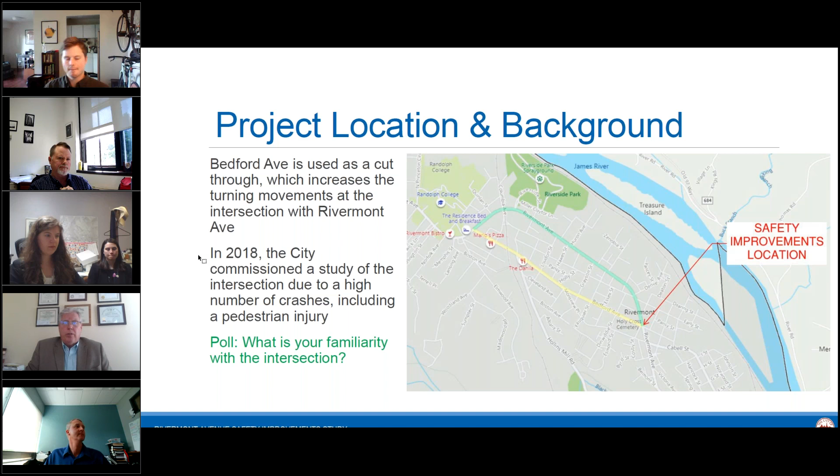Now for the next slide, Mike Johnson with Hurt and Proffitt will describe the rest of the presentation to you. Thank you, Bill. As Bill said, my name is Mike Johnson. I'm going to be the design engineer for the improvements. We'll also oversee the actual construction, which is going to be a big part of this project.

Wanted to go through the background of the project to where we are today, and then where we're going moving forward from here.

As Bill said, in 2018 we had a traffic study done of the intersection. What you see on the screen to the right is the recommendations of that study. Based on the fact that 25% of those northbound turns go left onto Bedford Avenue, and almost all of the traffic coming off of Bedford Avenue is turning right or southbound onto Rivermont, the recommendations for safety improvements at the intersection included this median that cuts off the left-hand turns off of Rivermont and off of the two approaches of Bedford Avenue. This recommendation was used for the federal funding grant.

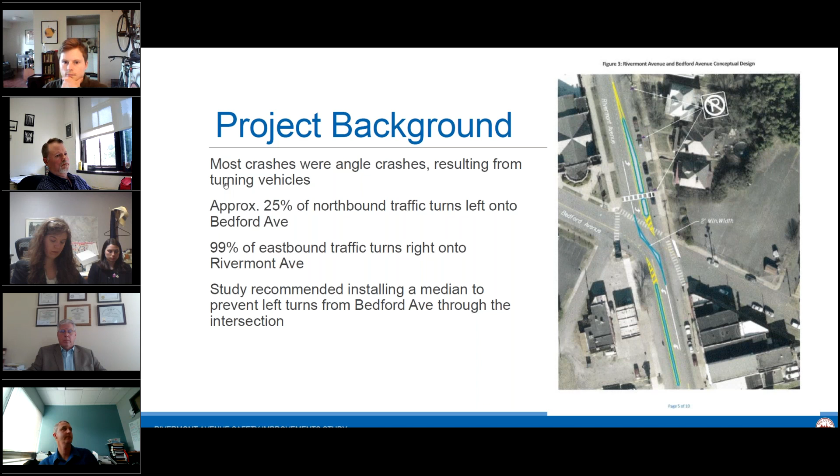Phil, do you mind going to the next slide for me? So the project, based off of that study, scored very well on VDOT Smart Scale funding application. The funds are already in-house in Lynchburg, and we're moving forward with the design of the improvements.

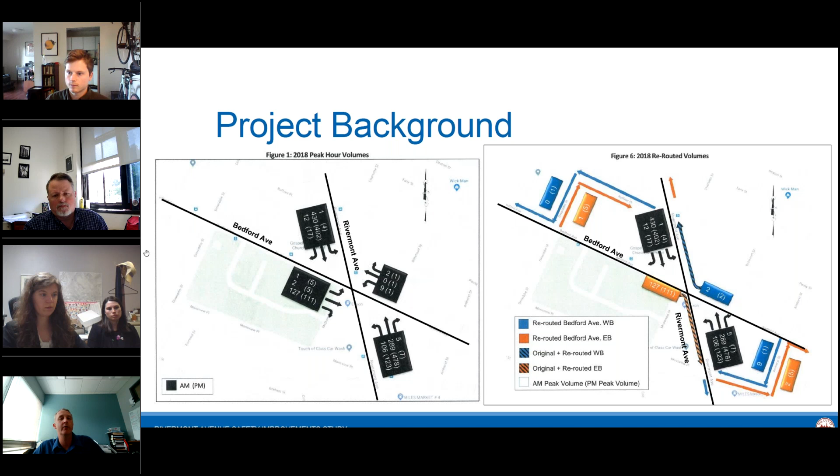Because this project scored so well on the federal funding, we're limited to the improvements that were made in the traffic study. So I know we've had a couple of questions about a traffic signal at this intersection. One, we have the limitations of the funding application, and two, when you evaluate it based off the federal standards for a traffic signal warrant, we would actually do more harm to this intersection if we were to signalize it, because it reduces the amount of traffic that can move through the intersection, and we would expect very long delays on Rivermont for traffic trying to go through.

So the typical process for these state-funded and federally funded projects is you conduct your study. You usually have some sort of funding application that can take one to two years to get through that process. Once you get your funding acquired, then you start with the design. We begin with survey, go through public involvement meetings, and then finally narrow that down to a final design, and then we move on to the construction phase.

We are just now beginning the design phase. What we're going to show in this meeting are a few of the conceptual designs. We haven't put a lot of detailed work into them, so some of the geometry is a little awkward and not real smooth, but once we narrow it down to a final concept, then we'll finalize all of that design.

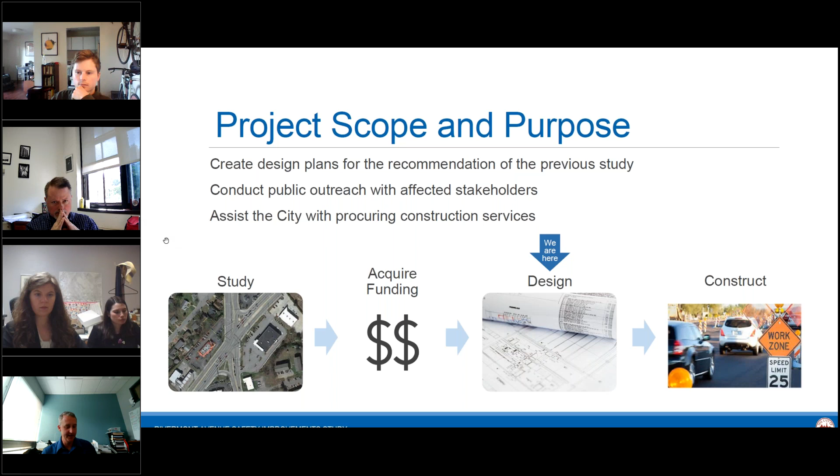So some of the design elements we're looking at, in the upper right-hand corner is a traffic engineer graphic. It shows all the different conflict points that are potential at an intersection. In that 2018 study, all of the blue dots there were conflict points that were removed by reducing those left-hand turns moving across the intersection. It allows the primary movements to still flow but eliminates some of the unnecessary conflicts where we're looking at 3 and 4 vehicles per hour making the movements.

The crash data is from 2014 to 2020, and that's reported through the state police on the virginiaroads.org website. We had 9 property damage accidents. There were 11 minor injuries and 2 what they consider severe injuries that occurred within the vicinity of the intersection.

What we're looking at for the actual design, we have a WB50 tractor trailer that we're trying to get through the intersection, making the left onto Bedford and then the right back onto Rivermont to that bypass. That's about a 53-foot long tractor trailer. It's a little smaller than most of the tractor trailers that you would see out on the interstate, but a little bigger than the ones you normally would see moving through a downtown area. As you can see, that outside turning radius needs to be almost 50 feet in order to make it around that corner at the Exxon station.

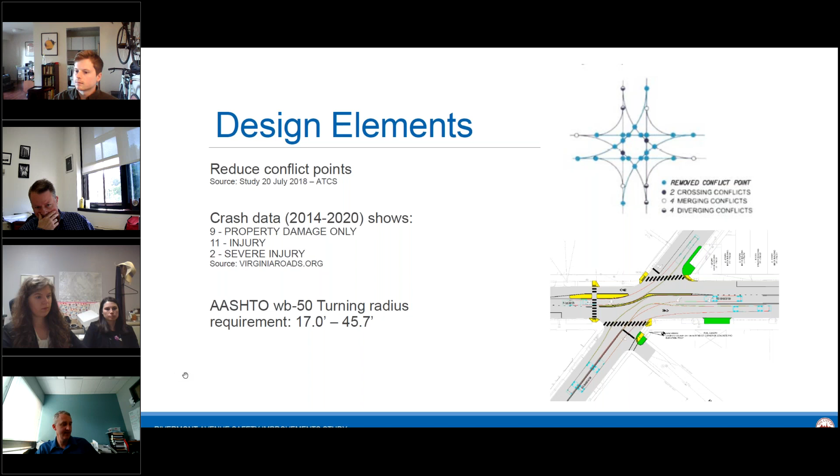We also had 34 pedestrians who were crossing what we call a mid-block, where they have an unprotected crossing over Rivermont, kind of coming into the south side of that Exxon gas station.

We also put pneumatic tubes on the ground and calculated the 85th percentile speed. That's normally the speed that you would use for design of vertical curves, intersections, and entrances. That 85th percentile speed came out at 38 miles an hour, and we did note that the road is currently marked at 35 miles per hour.

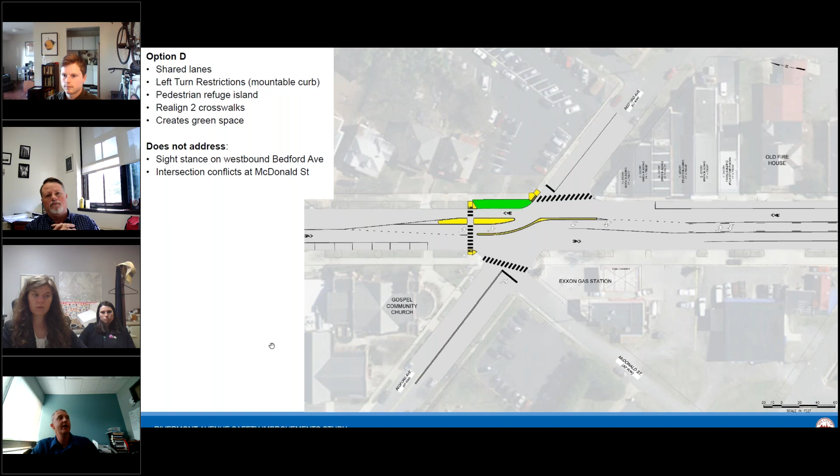And then our next iteration is option D. This one continues with the shared lanes. We've also widened out the receiving lane on the north side of the intersection, so as you approach that large concrete island that's going to have the vertical curbs, you've got a little bit of extra lane width to move through, but that will produce some traffic calming. The traffic that's moving at 38 miles an hour now is going to be slowing down as it starts to navigate through this intersection.

We still have the same pedestrian refuge island, a little bit of different geometry, and we're actually realigning 2 of the crosswalks. The crosswalk on the west side of the intersection, there at the bottom of your screen, is going to come up right in line with the sidewalk on Rivermont Avenue, which allows us to move the stop bar on Bedford Avenue forward, increasing that sight distance a little bit.

And we're also going to look at converting McDonald Street into a one-way street so that traffic can turn right off of Bedford, but there won't be any left-hand turns coming off.

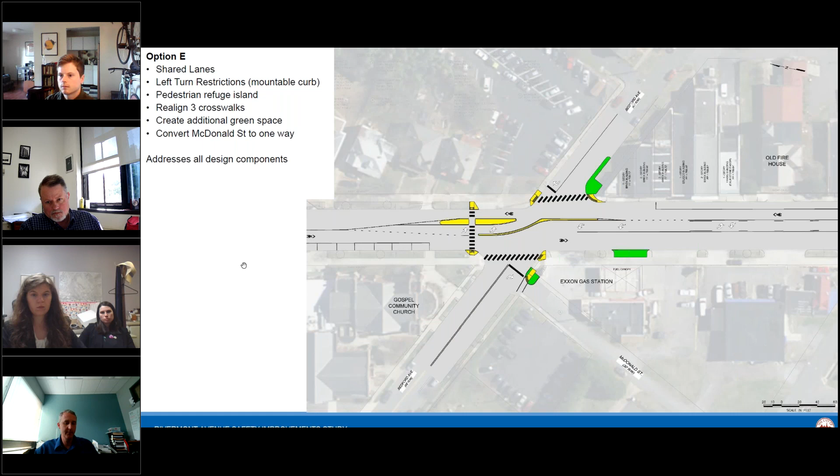So that's just kind of a summation of where we are now. We've already received some feedback from a few of the residents who live right there in the vicinity of the intersection, and we would appreciate any comments or questions that you have at this point.

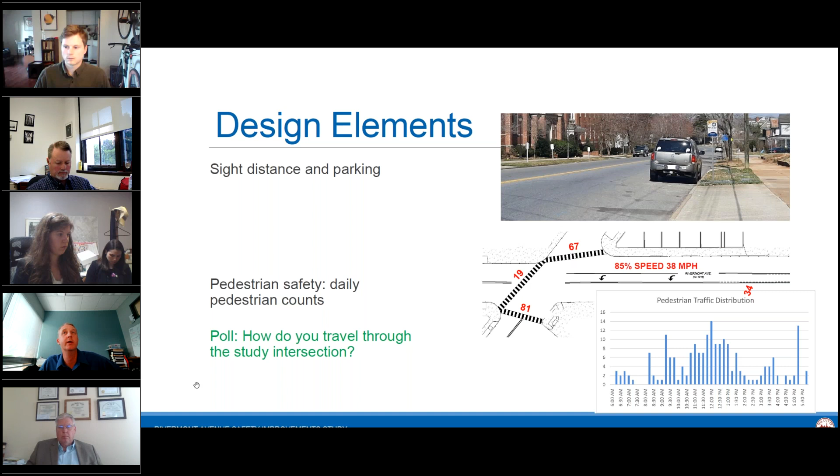Like I said, our initial concept included some of those, but trying to accommodate it with the turning movements at the intersection was a little difficult, and we were backing up traffic in order to accommodate those movements. So the other option I'm looking at right now is looking back at Cabell Street and why the residential crossing isn't occurring back there at Cabell Street as opposed to coming halfway up the block and across. And I can tell you why I do that.

Go ahead. For myself, it's safer to cross there and then cross over at Monsview, which has a little bit of traffic, than to cross even Cabell from the store to the other sidewalk, going up the middle of the block at Bedford Ave, where the child was hit last time. It's too much right there. You've got to watch from four different angles, plus the store exits are both in the middle of the block. So for me, I cross at Cabell and Monsview and walk up Bedford.

Well, and that was my question. Why? Because I would expect, with all the residential being south of that, aside from a few shoppers coming directly out of a store and walking across, that there wouldn't be that many mid-block crossings between Cabell and Bedford.

I think the younger crowd goes that way. Okay, traffic is slower as you approach Bedford Avenue because you at least have traffic that's just turning onto Rivermont and picking up speed. By the time they get to Monsview and Cabell, they're at 40 miles an hour, or getting close to it. So it's actually safer to walk a little bit closer to the intersection where traffic is slower.